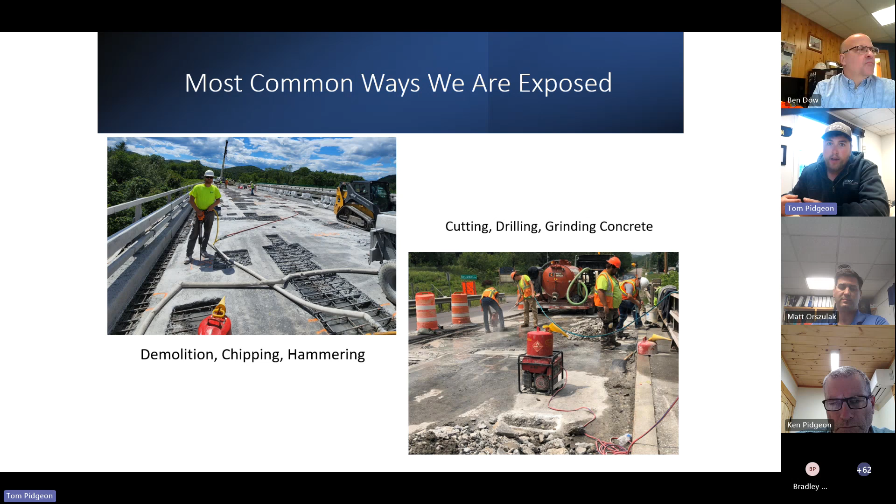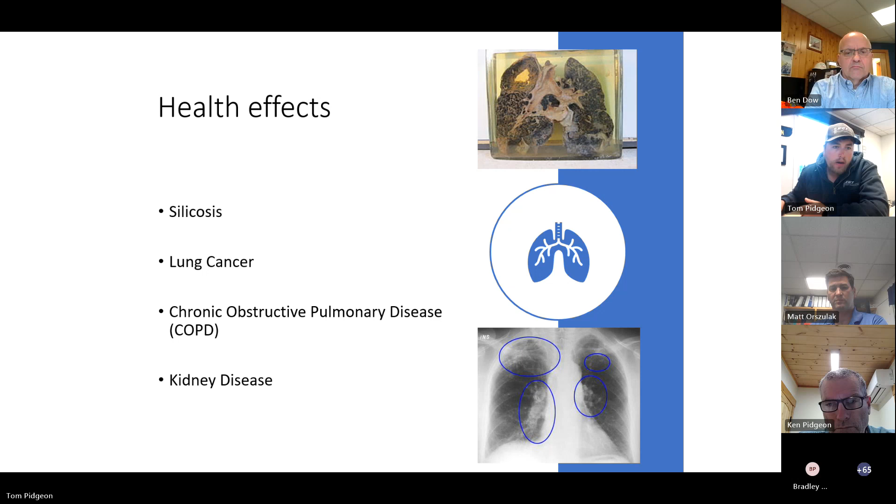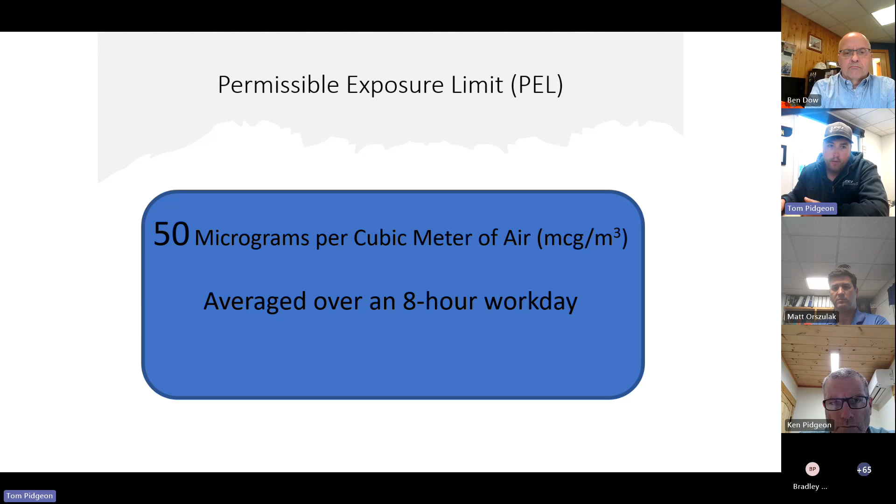So the permissible exposure limit for OSHA is 50 micrograms per cubic meter of air, averaged over an 8-hour workday. That's the permissible limit. If you're going to be working with it day in, day out, maybe we want to keep it under 50 micrograms per cubic meter of air.

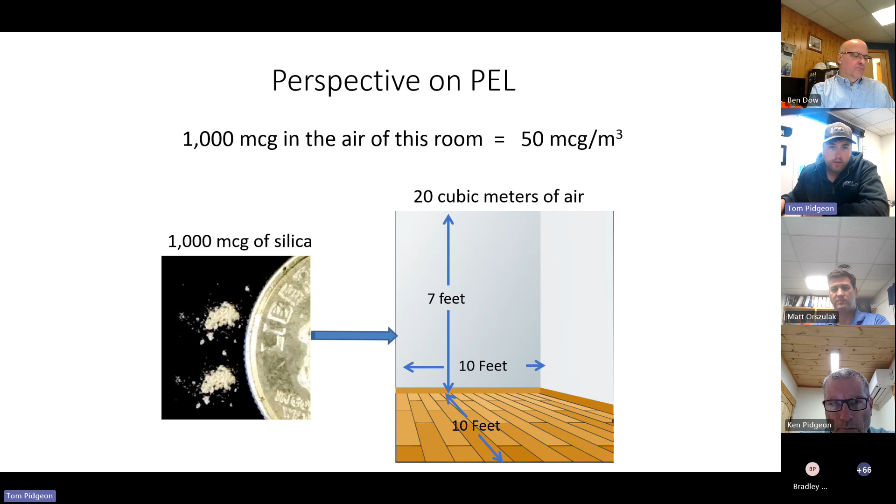So whenever it comes to an OSHA job, the easiest way to figure out whether or not you need to wear respiratory protection is a table called Table 1, which is easy enough to remember. If you ever forget what it is, just reach out to Matt or myself or anybody, and we can get it over to you.

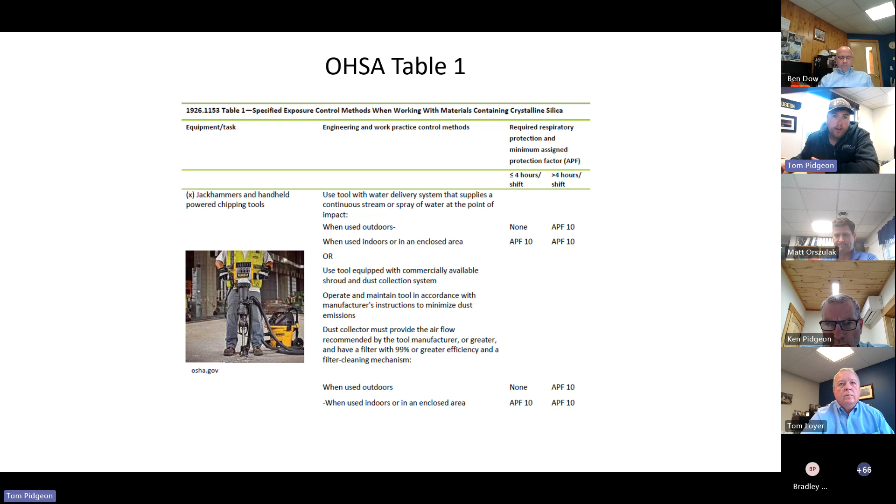Basically what it tells you is: this is the task I'm doing, so I'm using a chipping hammer, and whether you're doing it wet or with a vacuum system or what you might have, for how long you're doing it—whether it's less than 4 hours or more than 4 hours—it'll tell you what you need for respiratory protection. So you see that if you're jackhammering wet for less than 4 hours, you don't need to wear anything. But if you're doing it for more than 4 hours, or you're doing it inside, then you need an APF 10 mask or better, and that's just a dust mask.

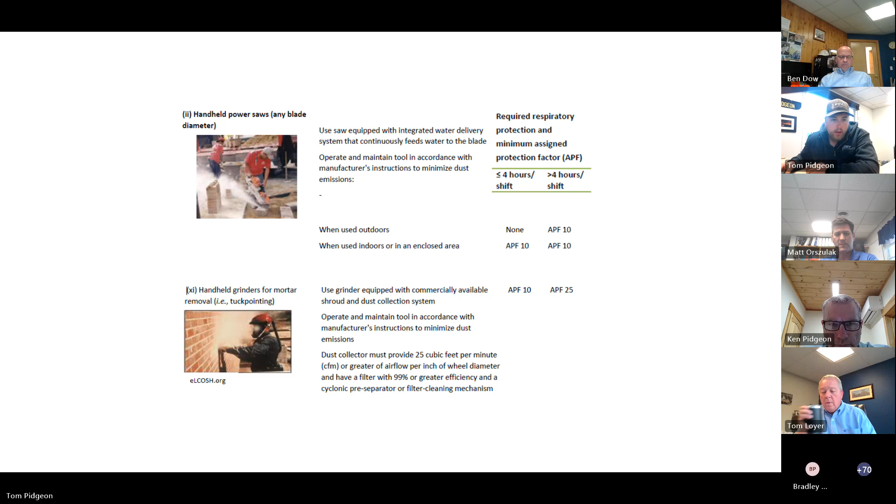So the assigned protection factor, the APF, is put in this table here. Your APF 10 is what you're most commonly going to see and use, so that's your dust masks and things like that. Once we bump up to APF 25, which is needed in some instances, then we're getting into the PAPR zone.

If you need to use them, let us know. Anything above that is getting into more specialized stuff that we'll have to set up in advance, so just keep that in mind. And if you're in doubt about something for a job, make sure you reach out sooner than later so we can reference the chart and figure out what you need to do.

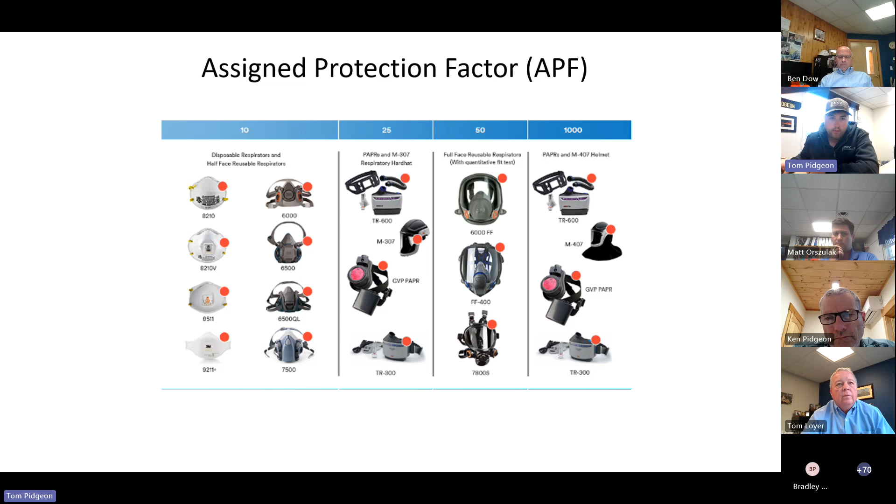Probably if we're at that far end of the chart, we're gonna look for other options anyway, right? Yes, if we can engineer it out rather than wearing respiratory protection, that's preferred. And if it's a situation not covered, we have the ability to test the atmosphere. So just give us a call. We can see how much silica is in the air, send it off to the lab, and come up with our own chart for how long we can do stuff for with or without respiratory protection.

So that sums it up for silica dust. The big thing is just think it out beforehand, have the right protections in place, the right engineering controls, the right PPE if you have to. And if you have to use two things in combination, that's probably even better.

I'll stop sharing here. I think this is one very visible activity for our workers outside, in a public area where OSHA or anybody driving by would see something. We see our competitors out there often with a whole mass of dust around them. But also I think of protecting the public too - if we're out there and we don't really want to be blowing silica dust over somebody's personal space.

If you're cutting concrete, let's say, and you're chipping concrete and using water, and according to the chart you're good to go, but you're still creating a bunch of dust, then either you need to use more water, or you need to add a mask, or a combination thereof.

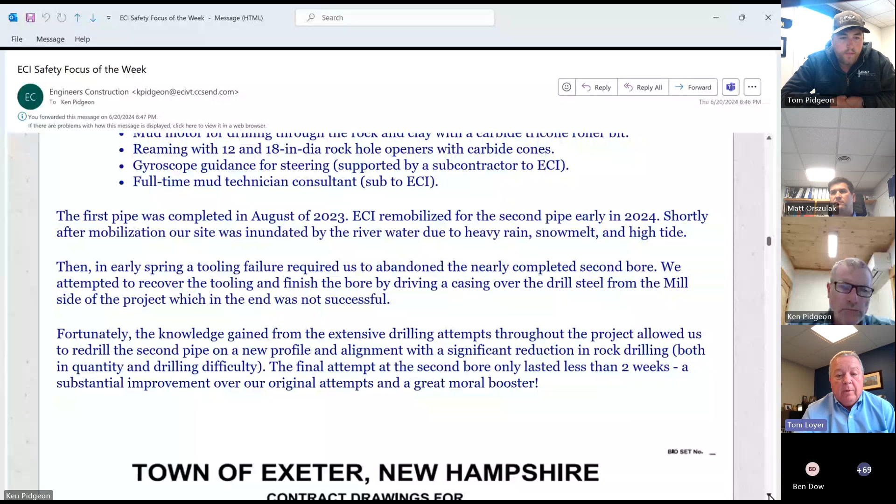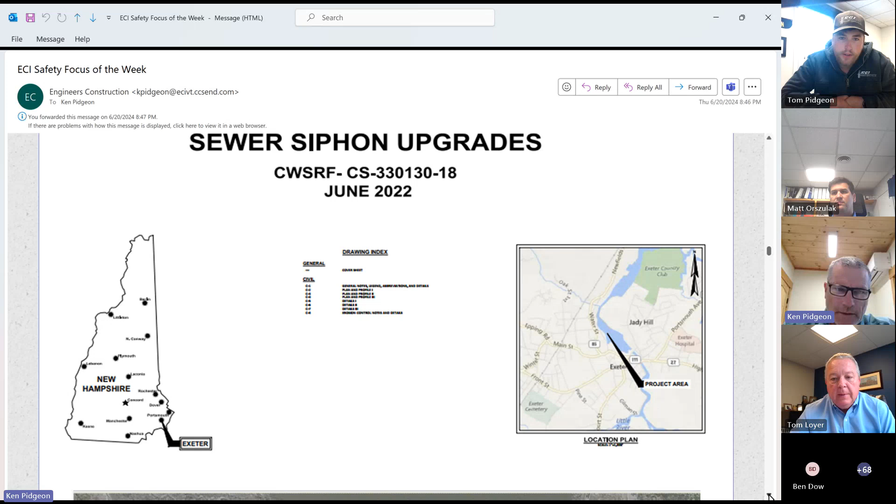Not far from the Portsmouth area. I think, Tommy, you live about half a mile from here, right? Yeah, about 10 minutes, close to there. So it was good to have you on site for sure. This drains to the Great Bay, right? That's the big estuary between Durham, New Hampshire, and Exeter and Portsmouth - this big bay that everything discharges to. And Newmarket - don't forget Newmarket. Exactly.

Here's the January flood, which you can't see from here, but I thought was really cool. As you go to this project, when you're coming on the Swasey Parkway, there's a big rock that just sits there near the gate, and that was underwater.

If you go to that site, it gives you a great perspective on how deep that water got. But it didn't really affect us. It was in and out quick. We were in a high-low tide situation, but this happened.

I think it was a Saturday, because I was down in Boston for something, and Mike was on site monitoring our equipment and whatnot.

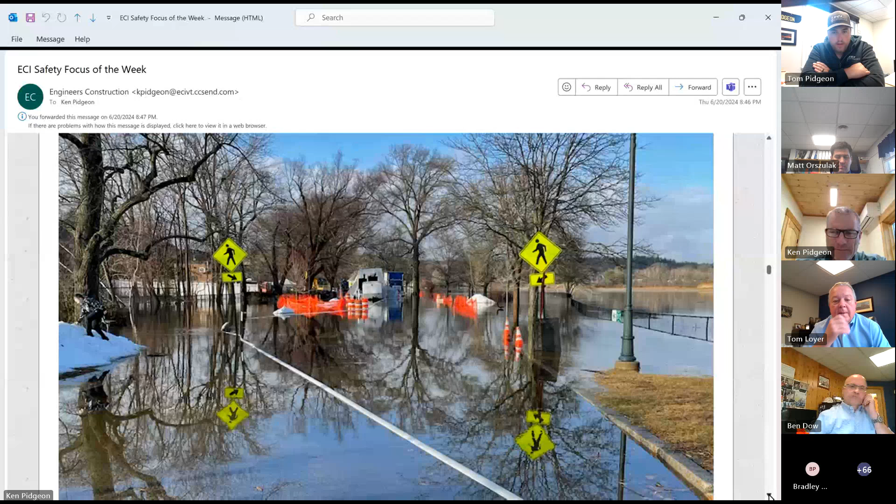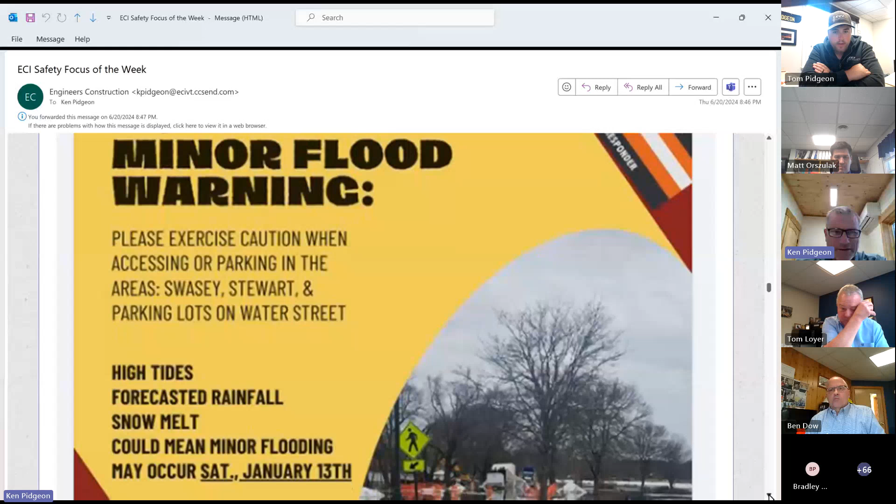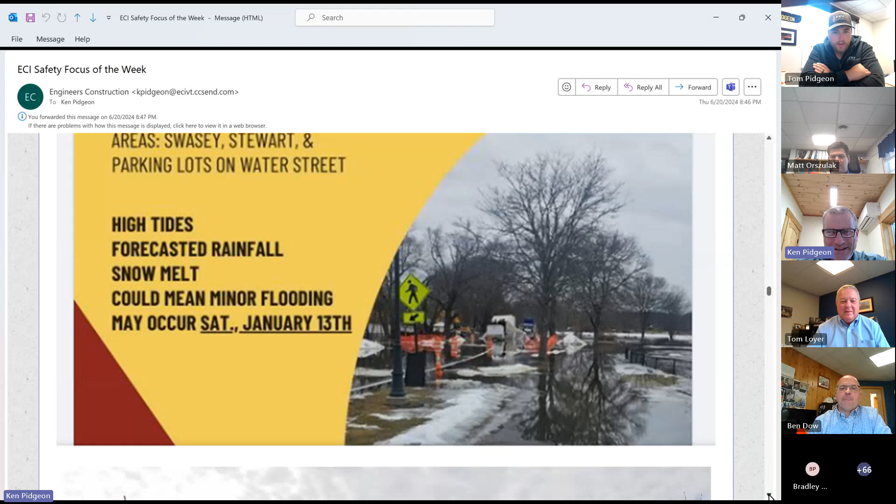In this next picture, I actually found this on the town website, and they put a warning out, although it looks like the event had already occurred. Please exercise caution when accessing parking in the Swasey and Stewart parking lots, Water Street. They talk about the high tides, and there's almost that same picture from the previous slide, which was from Michael Wright. There's our equipment down there that they took the picture of for this warning they put out. Yep, proved to be true.

Okay, so here we are drilling. I think this is from the Swasey side. You're looking across to the mill, I believe. I think that's the case here.

This is early, you see ice on the river. We used both of our 100s on this machine, on this project, and we were trailing rods as well. So it was, once we piloted it out, of course.

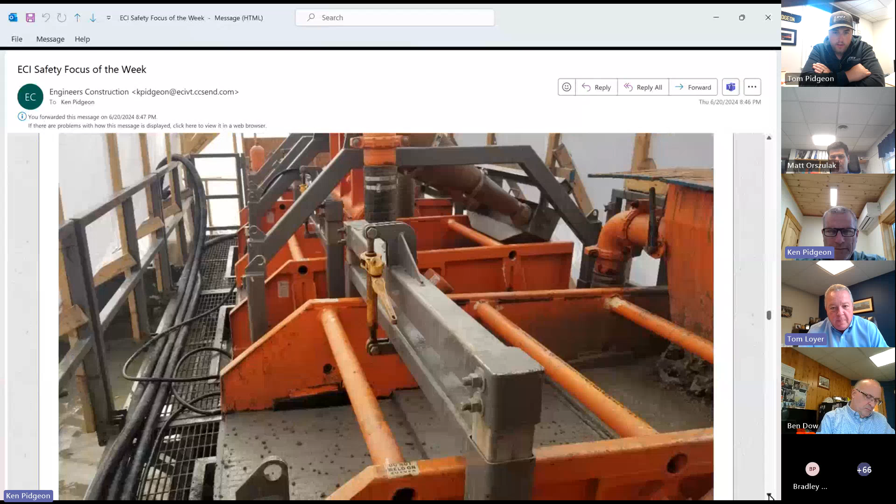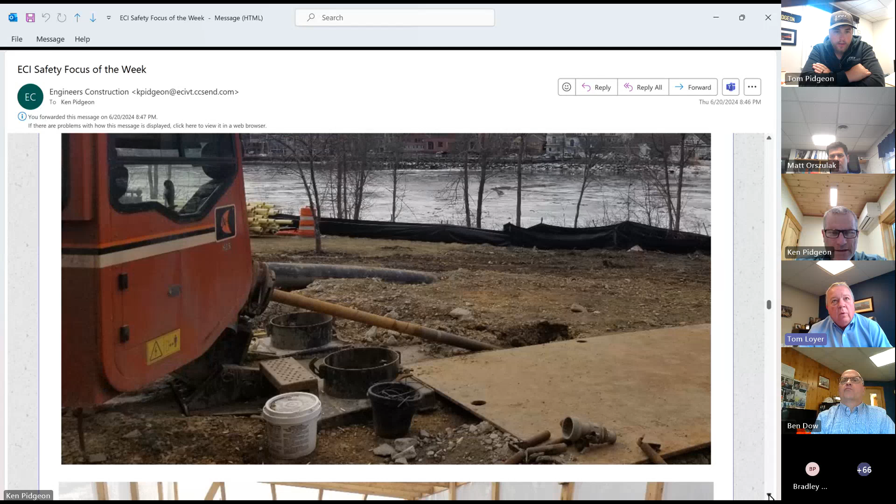This is a picture of our Tulsa rig, our reclaimer. This machine got a lot of work on this project for sure. Brian Coda led the way with this machine, and we did a lot of cross training on this project to get a few of the other team members up to speed. So we feel good about our cross training efforts there.

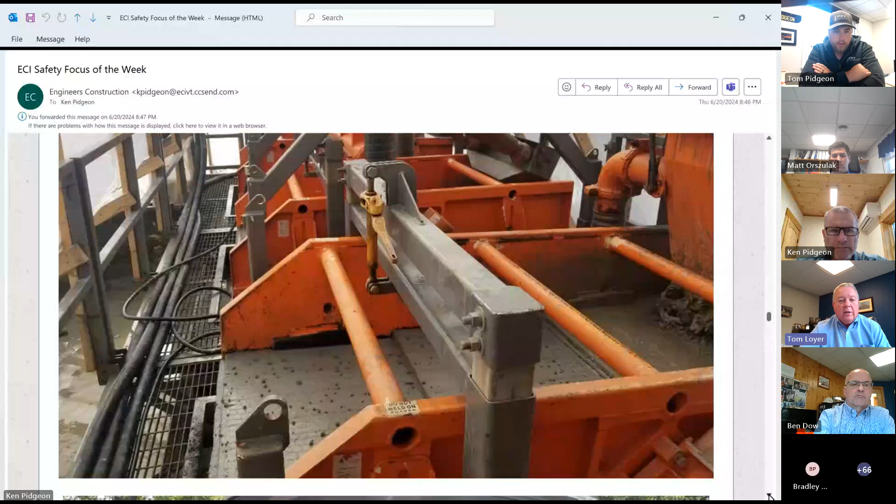This gentleman is Mike Jones. He's with Right Turn Supply. He was our mud technician that was required. He came out of the Houston, Texas area and spent a lot of time up here. We were required to report our mud properties on an hourly basis every day to the engineer on this project, and that was part of the effort to show that we were mitigating and doing everything we could to prevent fluid release within the river.

But really, we were always doing everything we should have been doing the whole time, without even having an inspector like that. Yeah, they wanted a third party person, and for us it was an add-on. But our guys are well trained in this discipline.

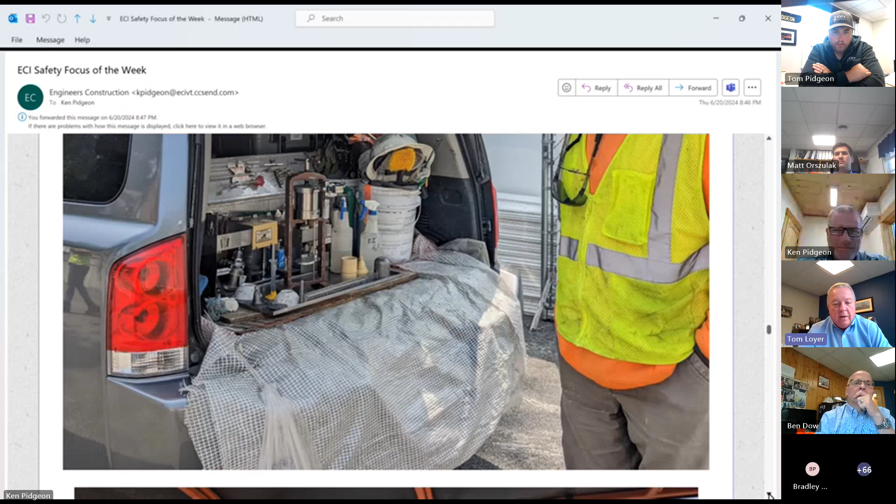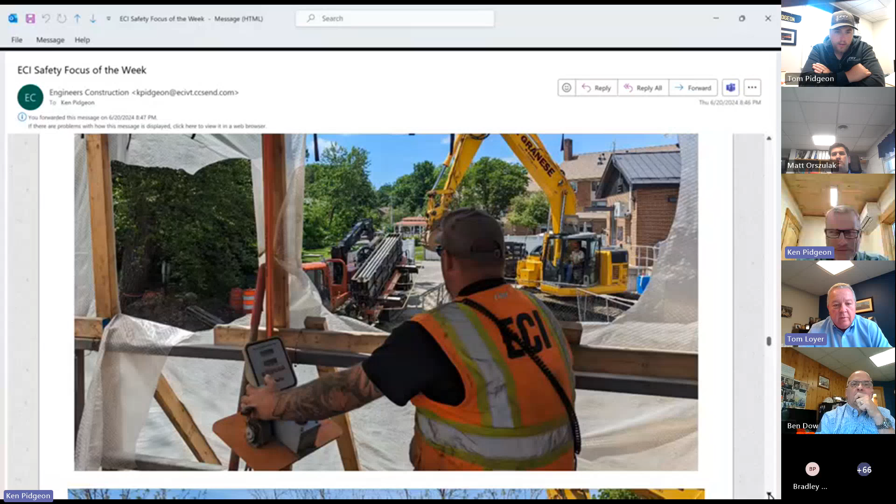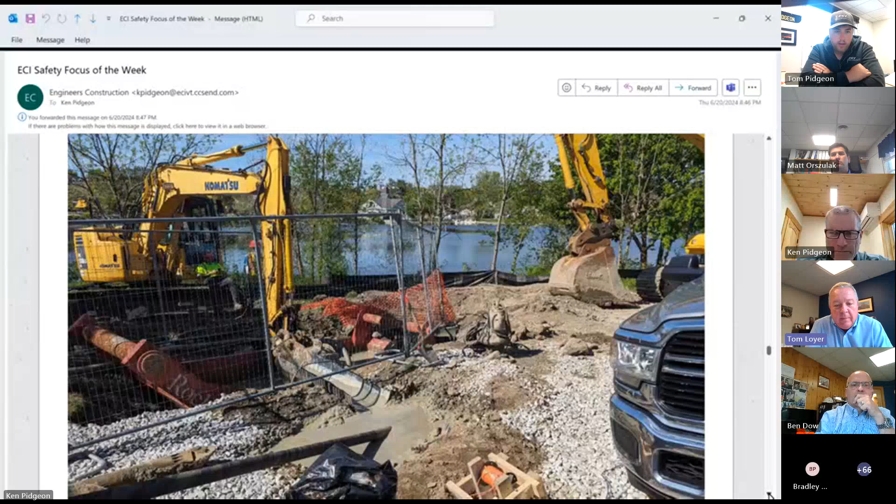This is from the Swayze side as well as our pumping system. I believe that's the Swayze side, it's hard to tell in that picture. Mill side. Mill side. All right.

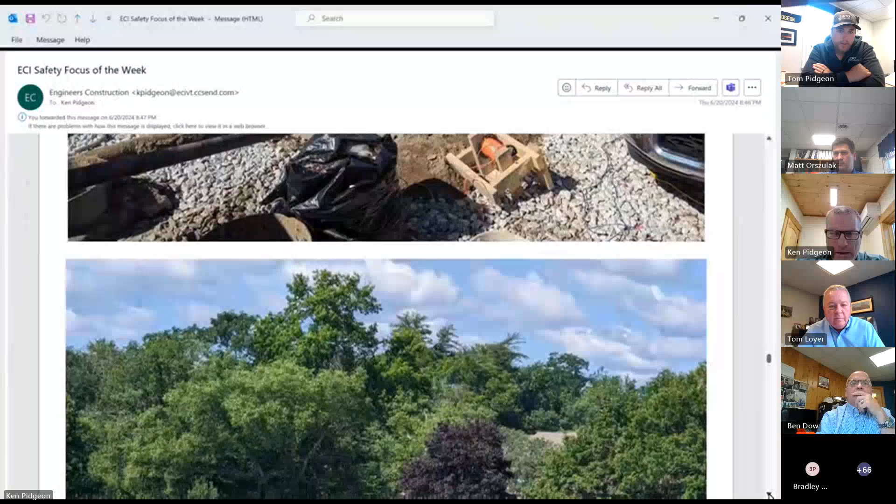This is from the mill side looking to the Swayze side where we have the reclaimer set up.

This is our small job trailer we used for our Gyrotech, for our wireline technology. He sat there and worked this system all day long. So they help us steer and keep track of where we're at and do as-builts. Steer, downhole pressures, the data we get out of the gyroscope is more than we needed.

But we were able to provide as-builts all along the way on a daily basis as we needed to, proving our elevations out. So there's a lot of technology in that system for sure. Downhole pressures was a big one for us on that due to the fluid.

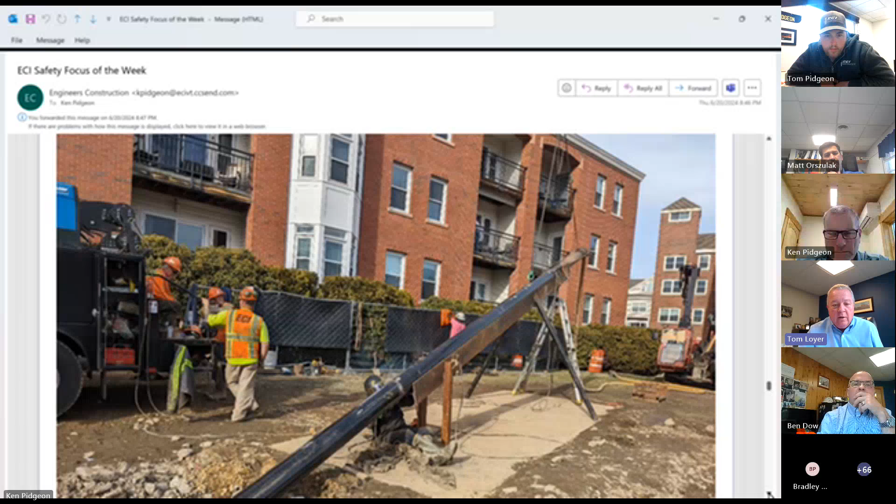And this is from the mill side. When we had the tool failure, we attempted to drive casing over our drill steel. Pat Wells spent a ton of time down there. Thank you, Pat and Mike and everybody who participated on this project, actually. But we were able to successfully drive the casing for about 100 feet and didn't quite get to the rock. We had to work through some bend radius stuff there.

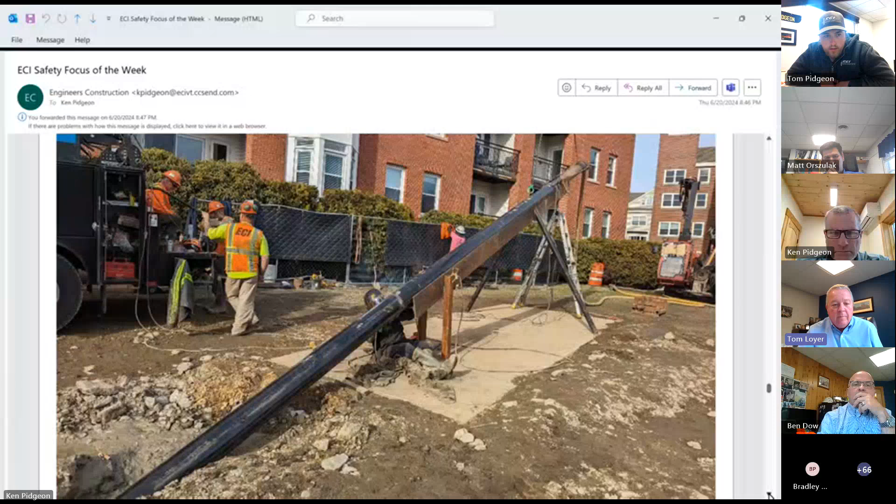But ultimately, prior to getting to the rock, we had some granular soils, and I think it really just bound us up, and we were not able to successfully retrieve it. But the effort was solid, and I think it was the right step to do for sure. So a lot went into that. Close-up view of that same process.

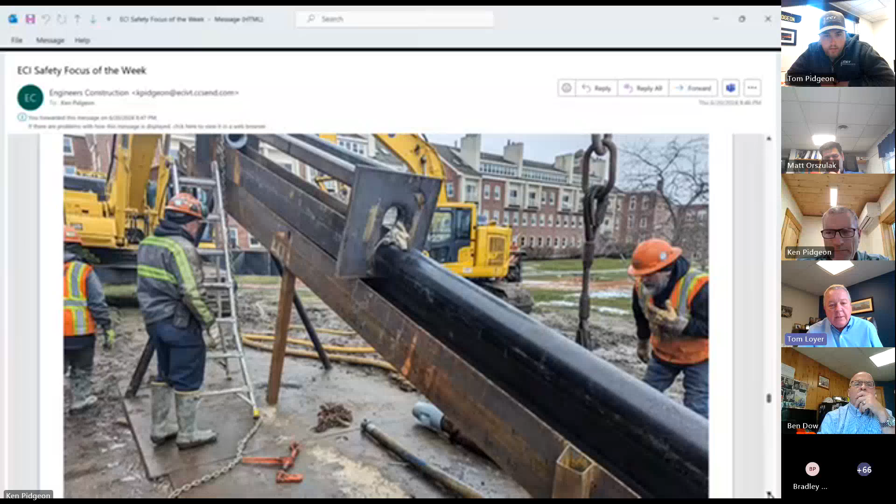Mike looks like he's spitting on the pipe or something. Sure, he probably had a few choice words for it.

Another view from the mill side. And the mill side is a residential area. The mill side had homeowners at every monthly meeting. They were there, and they were very user friendly for us in a very difficult situation. But...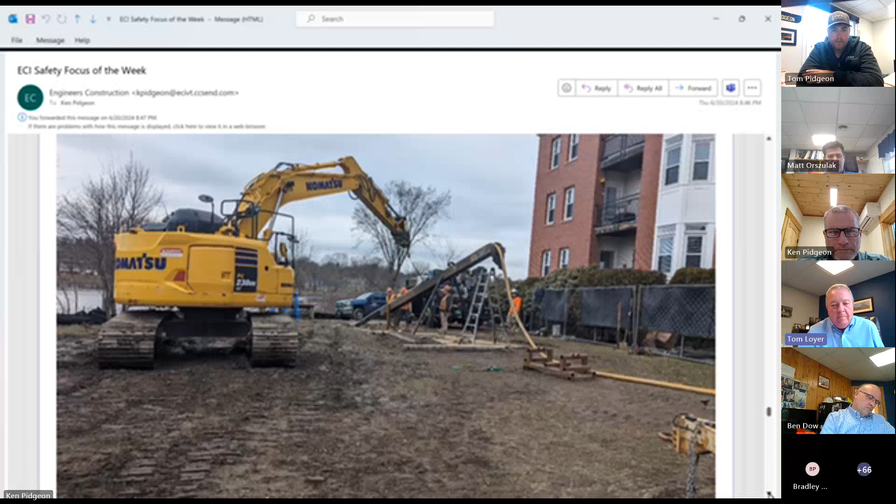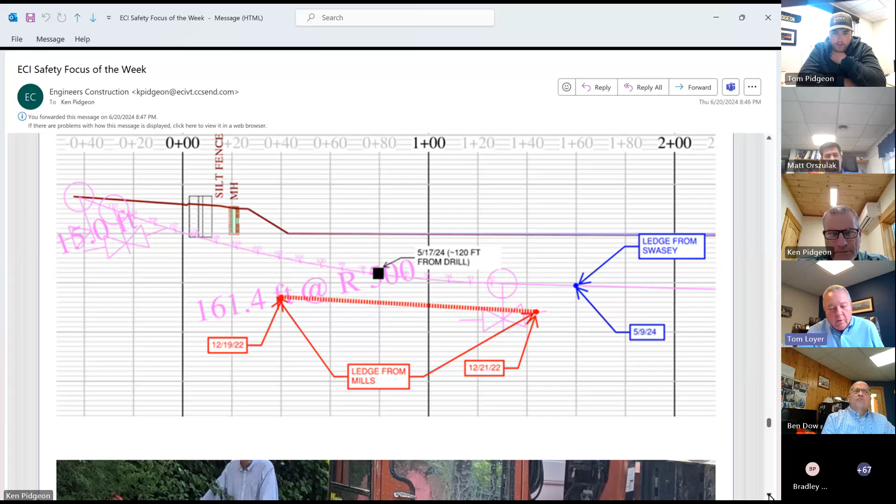This shows where we were trying to retrieve to, this black square here is where our breakoff occurred, and we drove from the left side. That's kind of the limit of rock that we ended up drilling, right? Yeah, it also shows that too. Exactly. That piece here between the black and the blue, that ended up being ultimately where we drilled through the rock with the pilot, the 12-inch and the 18-inch. It's also the profile that we tried to retrieve.

There's what we like to see. So this piece right here, that final piece you see there, is the 12-inch pipe itself.

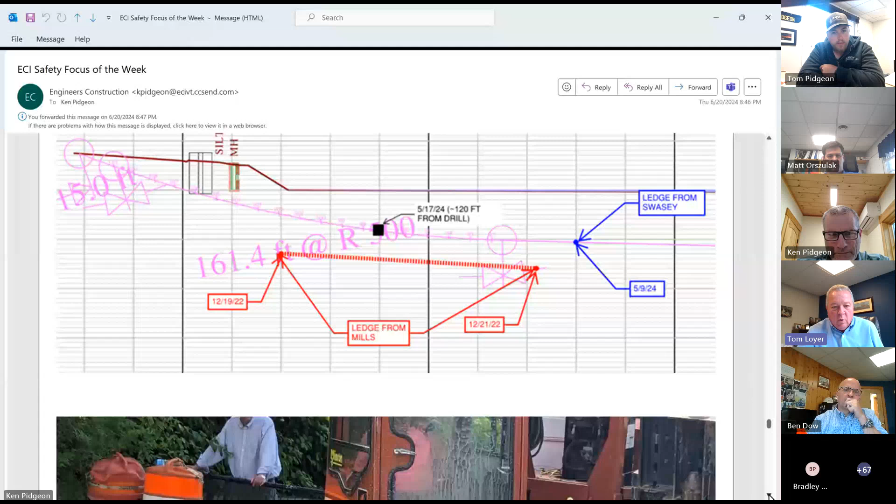Mike and his team fabricated this protective sleeve to go over our swivel, because we had, as I mentioned, a junk rock section on the west side of the project coming out of the rock. That prevented rocks and unstable stuff from getting into the swivel and causing further problems. We've done that on a few projects successfully, and it certainly was needed here for sure.

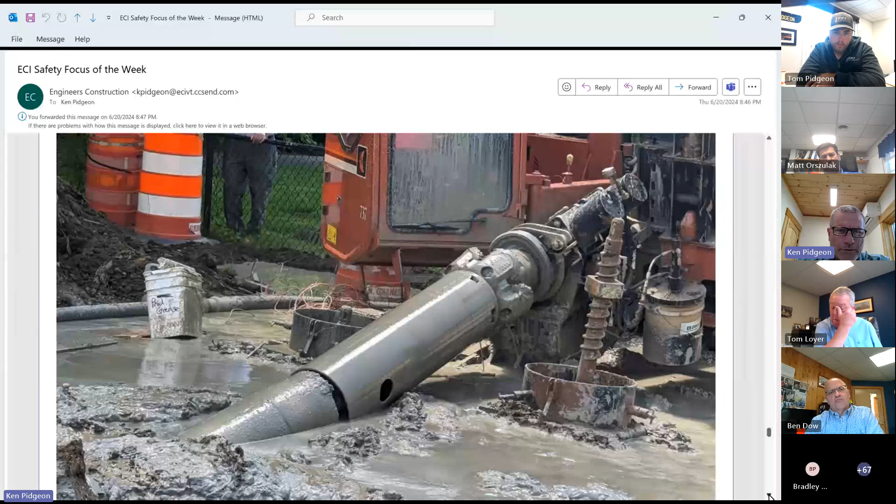Yep, let me back up a little bit. I guess there's another issue with my photos. In this case, I had the pipe here as we were pulling it back in, unless it's after this one. Oh, there it is. It should have been before that, but yeah.

So this is the Mills side, as I mentioned, and a big part of the effort here was we were concerned about the borehole stability from the Swasey side, where we really had the soft muds. So we wanted to ream that, do a final ream through the rock, grab the pipe, and go.

So the timing of this was critical, and on the Mills side, we didn't have the room to put it all together, so we had to do it in sections, and it was a tightly coordinated thing. Veritech, one of our suppliers, provided a technician to come in and help us fuse to get that all to happen. But it was critical to the success of the project for sure.

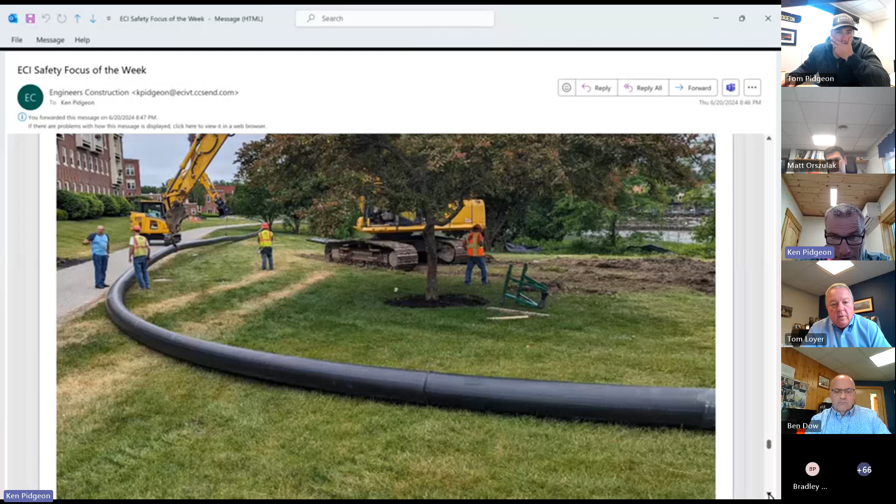This shows you how challenging it can be to manage the pipe going through, because it's a long 900-foot plus pipe there. Yeah, exactly. All right, well thank you, Tom, good job for everybody. Good job to have done too.

Yeah, for sure. And on that, Ken, we pulled that pipe in a couple Fridays, 2 or 3 Fridays ago, and by the end of that day I received calls from the Public Works Director, the city engineer, our client, our vendors, with great thanks to ECI for sticking it out on a really tough project. And thanks to all the guys who put anything into this, because it was a bear for sure.

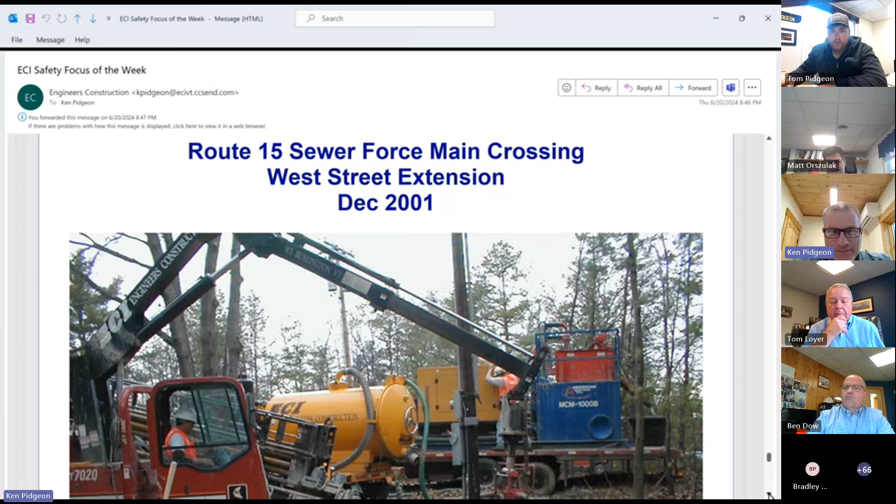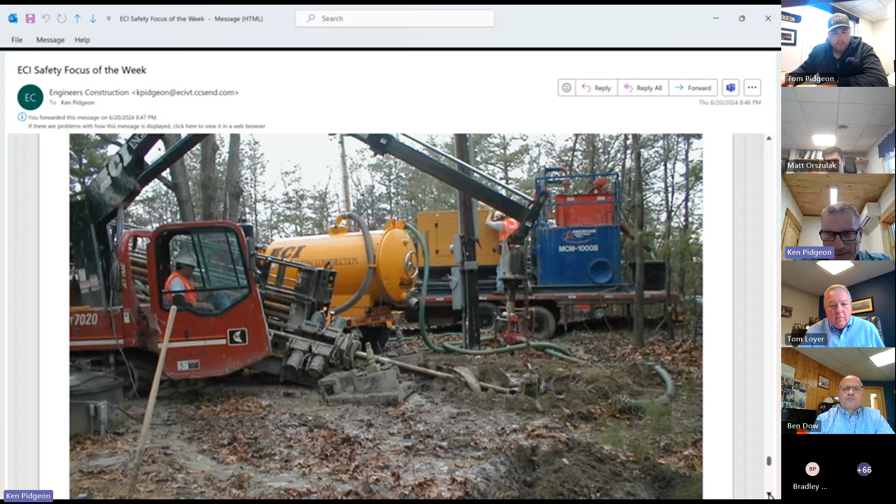So this project archive photo is the Route 15 sewer force main crossing. This is at the West Street Extension intersection, back in 2001. This is over by that little dentist office tucked in the woods there, drilling over to where that little jug handle is in Essex. So that was quite a few years ago already. Yeah, prior to my time.